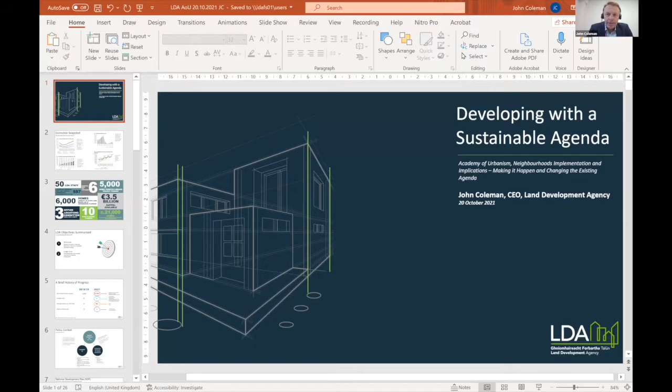So in my presentation, which I'll share now, I'll just give you a little quick whistle-stop tour of the LDA, where we've got to date, just our broad view on the sustainability agenda, what that means for us on a practical level for project base, and also from a governance base as well, and how do we measure, how do we monitor, how do we invoke this. So I'm just going to share my screen. And I hope that can be seen.

So the LDA, we started from nothing about 3 years ago. We're currently on sites that could yield around 6,000 homes, but there's been a commitment from government to transfer an additional 15,000 homes worth of land, if you like. And I think they're the really big opportunities, those longer term, larger scale ones where we can really drive master planning, efficiency of design, and some of the sustainability metrics that we're going to invoke, which I'll talk about in a moment. And so what's the LDA doing? It's doing two things really.

It's delivering mainly affordable homes on state lands in the short term, as quickly as we can through a number of ways. And also in the longer term, this active land manager role, this land assembly role - drawing a red line around very large scale strategic areas for putting together not just a design and master planning solution, but also an implementation plan. We'll talk about that again in a moment.

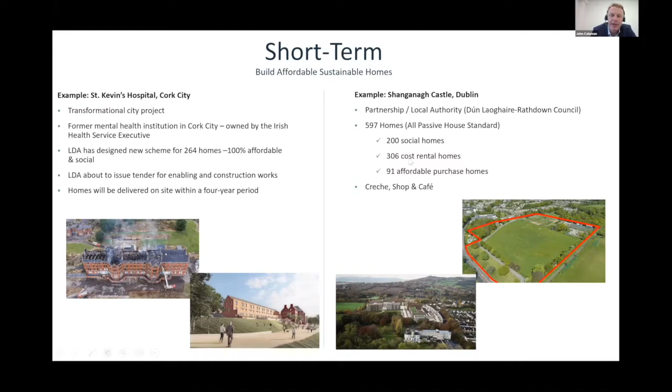Shanganagh Castle, similarly, is around 600 homes in partnership with the local authority, Dun Laoghaire-Rathdown County Council. The sustainability piece is the mix of social and affordable housing, promoting sustainable communities, but also the design standards themselves, very airtight and designed to passive house standard, utilizing a centralized heating system.

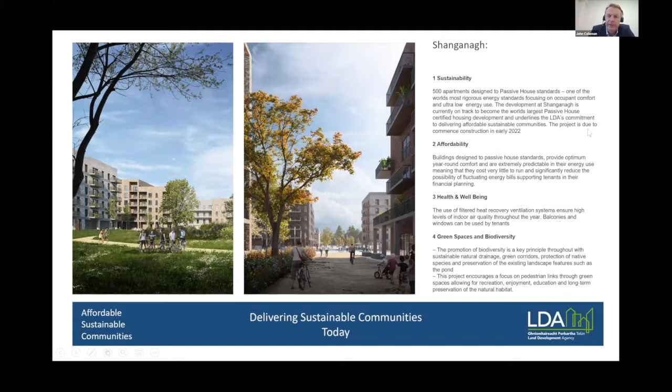So this is about delivering sustainable communities today. I guess the tagline there is passive house, and the certification of that I think is going to be very interesting, and we hope to commence construction early next year on that. There's also a number of green corridors and a lot of amenity green space included, which is going to make it quite a nice livable area to live.

So that's today, but in the longer term, I think that's really the big opportunity for the LDA and sustainability. I mentioned that we've drawn a red line around a number of areas within Irish cities that of their own could be transformational in the city context. So we've taken inspiration from a number of places further afield, which I'll talk about now.

Our approach to these has generally been to work with the Royal Institute of Architects in Ireland to bring in architects and perform a bit of a blue sky exercise called a design review. That comes out with high level ideas, and then to further ratify those and draw them out in the form of a master plan, which we've called a spatial framework, which positions us for consultation, and then we can look to pick off opportunity sites for development and planning applications.

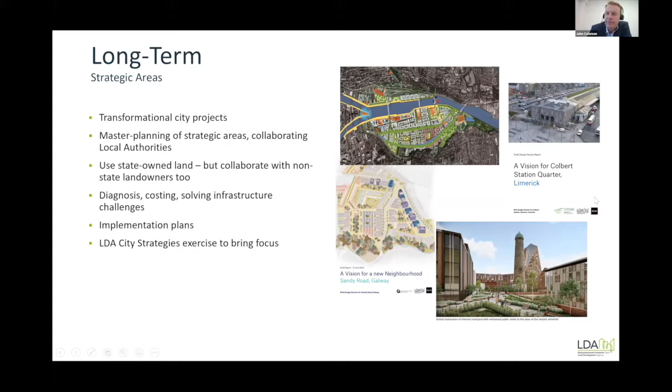We got some of the ideas for this concept at similar scale. Many people here will know about these: Hafen City in Hamburg and Nordhaven in Copenhagen share elements of what we're talking about. All state lands relied on transport infrastructure, were long-term projects, but were designated areas, master planned, with proper governance structures put around them to deliver them. That's the exact same type of concept we're trying to invoke with our strategic areas as well.

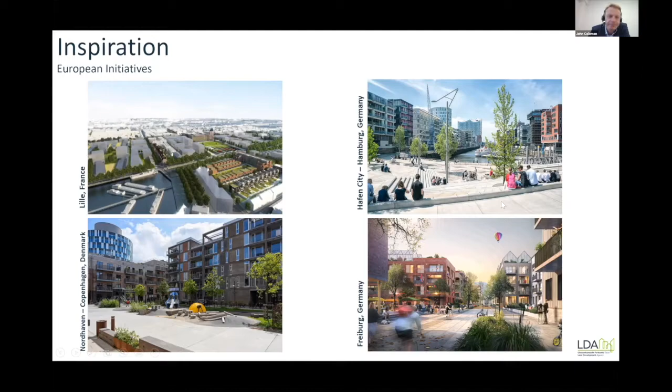Slightly closer to home, the UK - one I'll mention is by our friends at RKD Architects: King's Cross in London, obviously leveraging train yards and formerly half-derelict areas to bring forward a new rejuvenated area with live-work propositions. RKD Architects, an Irish architectural firm, recently won a competition for ideas for affordable housing in Sunnyside in Queens, New York, which is the largest disused train yard in America, I think. But these are all quite relevant, quite inspirational for us.

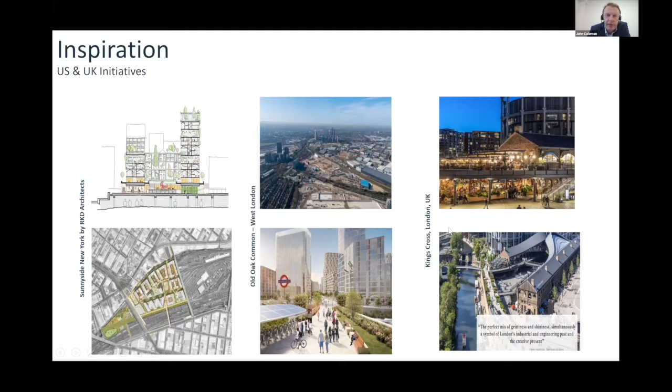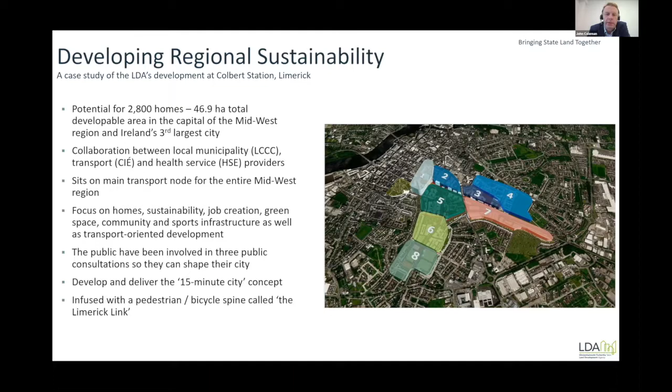So it's trying to create a new live-work proposition to attract investment, employers and occupiers, but to do it in a sustainable way, focusing on a modal shift away from cars. We've designed in a spine connecting all the districts, called the Limerick Link, which is an elevated pedestrian and bicycle lane that goes right through the site, and we think can eventually be iconic in bringing all the various parts of it together, really focused on driving away from car usage into more sustainable modes.

There's a significant focus on green spaces too. Maintaining the existing biodiversity and improving it is a key objective, but obviously we try to balance that with sustainable, dense development as well, which we want people to do.

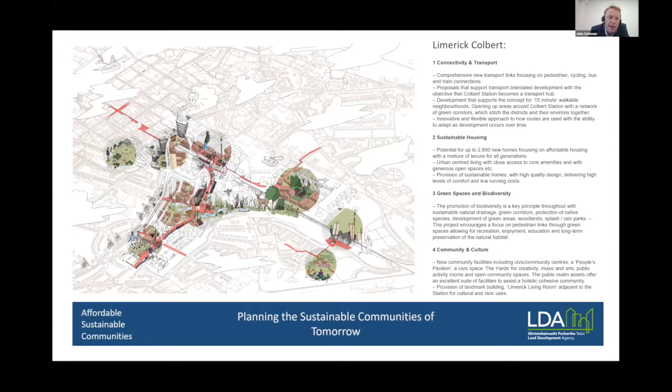One of the other project-level concepts we've been discussing and advancing: we have this constant battle in Ireland about height, and height is generally unpopular. We're trying to work with the concept that you can still have good densities without height.

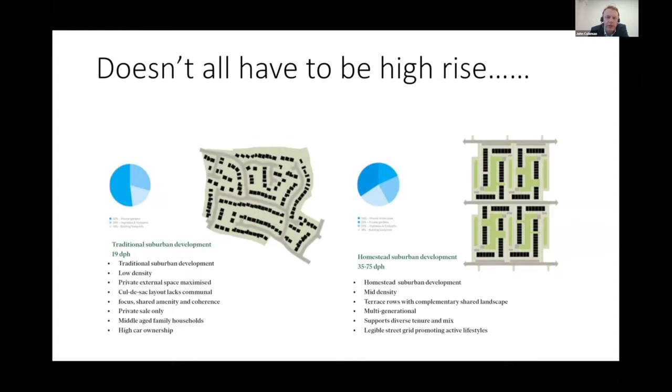One of our schemes, particularly Balbriggan, called North Dublin, is about 800 homes we're advancing through the planning system. We're promoting the idea of the homestead, a suburban development with shared spaces, more dense, more uniform typologies, rather than the traditional suburban spread-out big gardens. We think we can achieve quite good densities without necessarily going high, almost comparable to apartment densities at the upper end. This is an extract from that homestead model.

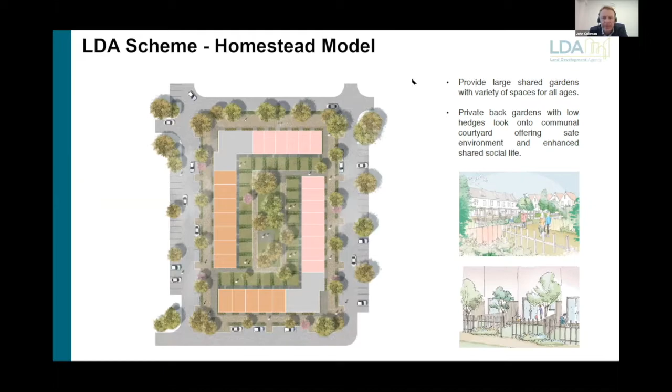The developer model in Ireland would typically try to concentrate densities over a wider site, with very high density in one corner while the more commercially viable, cheaper-to-build house typologies are spread more sparsely throughout. We're trying to achieve a more uniform densification through the site with mid-density typologies, set out as what we refer to as homestead.

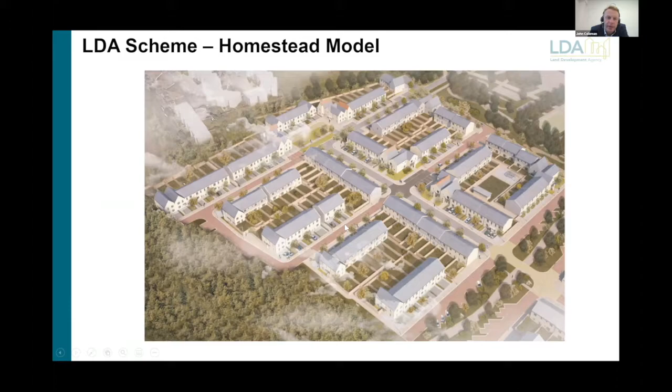As you can see, I think it's quite an attractive and inoffensive development form. A lot of shared space, and it's obviously compact and dense enough, but not too dense. That's just another artist rendering of it.

From a governance perspective, and how we implement all of this and measure ourselves against it: we have national strategic outcomes from the National Planning Framework, which is the wider planning governing framework. They flow into our own policies as a government body, and we are identifying metrics and governance to ensure that we measure ourselves against them.

We're a new agency, still developing these, but how we're going about it is that the National Planning Framework flows down through the LDA and the LDA Bill, now the LDA Act, which gives a statutory requirement to have a sustainability policy, implemented through the Board of Directors. We have a strategic planning and sustainability subcommittee which deals with all of these matters, and a separate strategic planning unit which comes up with policies and implementation aspects through design standards. That's broadly our governance framework to oversee this.

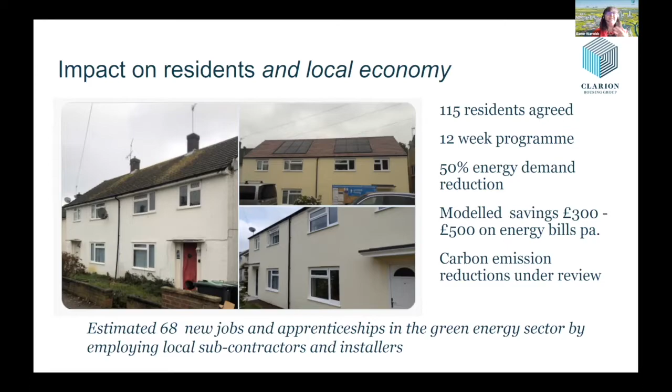We've got a really nice programme which is coming out from the learning from these pilots - partly monitoring long-term outcomes for residents. And again, there's some really practical things, like we are doing so many air tightness tests - it's going to be phenomenal, so much data coming through from that.

One of the things we're starting to think about, and we've got the bid already in for the next wave, is the first specification was quite Rolls-Royce. The level of investment, even with government funding, is quite high, and it's not necessarily sustainable or one we could roll out across all of those properties we have. So there's a lot of thinking going on about the specification - hopefully there will be economies of scale, but how can we do that? Because I think the history of retrofit programmes in the past is partly where pilots actually falter, and it depends not just on the subsidies and the subsidies stopping, but the established supply chains being able to deliver.

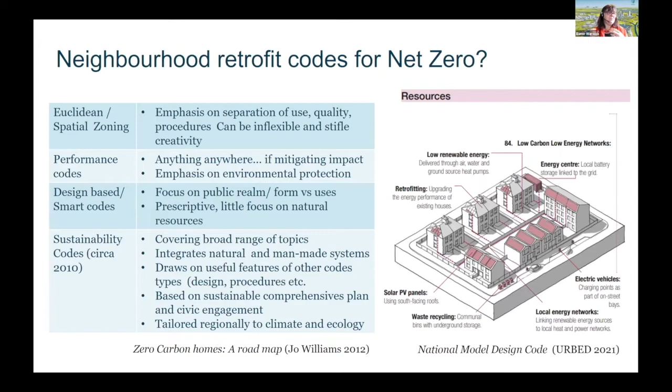My final slide. The message from what I've said is retrofit's hard. Reaching net zero, not just the standard of EPC, is hard. Scaling up from individual projects while keeping residents at the heart of that is even harder still. But if, like Clarion, you're serious about placemaking for communities over the long term, we have to be thinking and doing more.

I want to leave you with this idea: we need to be thinking beyond net zero to a net positive agenda. Rather than limiting our actions to doing less bad, to reduction, how can we have a positive impact, be regenerative, generate value, create, enhance and restore. As soon as you talk about generating value, that sits well with regeneration and even our developer colleagues. It's about bringing this all into a holistic approach.

Net positive is about creating a surplus, adding back more than was there in the beginning. It's not just 10% more biodiversity, but going from a rundown estate where everyone wanted to leave, to a place where people are keen to live, to bring their kids up, and to invite neighbours into their homes, which are warm and decent and places they can be really proud of. And I'll finish there.

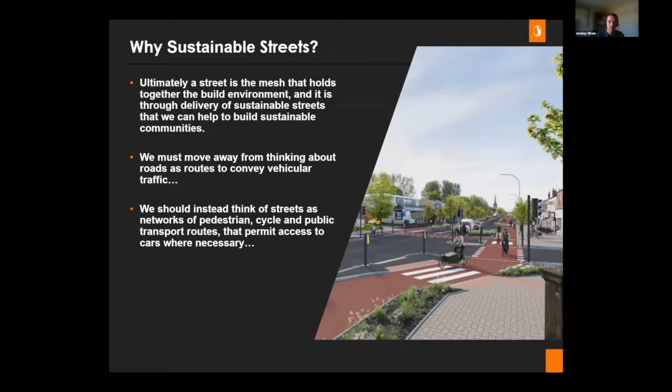So where are we at the moment, and what are the negative consequences of a bad street? A lot of estate road design came off the back of Design Bulletin 32, which gave a lot of the structure to the way we develop streets in new developments. It laid homage to the 6-meter radiuses, the verges, the footways to the side, and that kind of car dominance. That's resulted in the past 50 years in cul-de-sac developments, out-of-town shopping, complete reliance on car ownership, and poor use of space and lack of character.

And we still see that kind of blockage coming through. Design Bulletin 32 is still referenced by certain highway authorities, and it's taken a long time for some of the new thinking to break through.

Thinking first at a very high level from a policy perspective, and what sets the scene for what we end up delivering, currently our model is based on this idea of predict and provide. We use all manner of clever models to try and understand, based on how many people we think are going to move into an area because of the developments happening, what impact that's going to have on the local road network, and therefore how much bigger we need to make the roads, how many new roundabouts we need, where we need traffic lights—all these things that end up making larger and larger bits of road network.

And we move from that to this idea of vision and validate—saying the local area, through policy documents, has a vision for what they want the neighborhood to look like, and we as designers have a role in making that vision happen. Rather than saying we know that 100 new houses is going to generate X number of car trips, we want to say there's 100 new houses, and therefore we're going to put in really high quality cycle infrastructure and a new bus route, and actually encourage people away from their cars and onto more healthy and sustainable modes of transport, creating the future that these visions have set out.

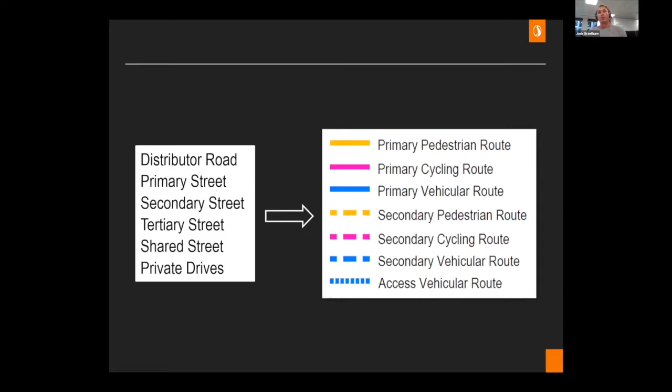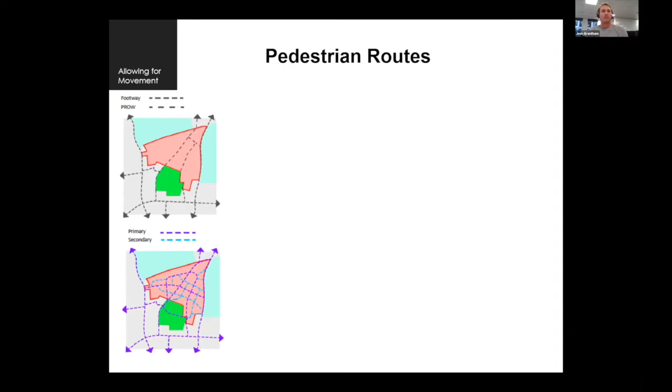Starting with pedestrians, we think about the existing infrastructure, how we're thinking outside of the red line boundary, public rights of way for instance, and we're asking designers to create primary and secondary routes—really simple, but creating a nice tight web of routes.

Then we go on to cycling routes. We've got lots of new documents to reference here, but we still need to think about how that fits within the existing context of Suffolk, understanding the existing infrastructure, and then creating again that web of primary and secondary routes. You'll see why the primary and secondary hierarchy becomes quite important.

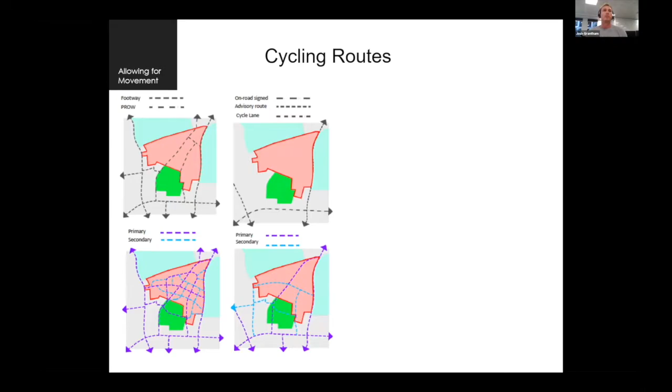Public transport is a slightly different beast because we need to think about the public transport routes—they set the tone for how we should think about primary vehicular corridors, so where are our bus stop locations going. Then, second to that, we go back through stages one and two, referencing and checking that our cycling and walking networks are set up to align with the transport network.

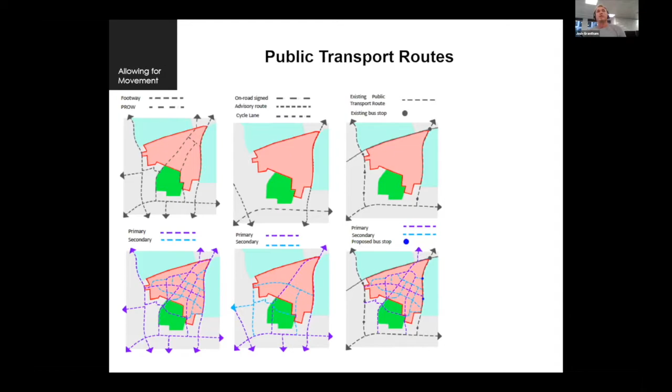Finally, we think about vehicular routes, for the private car and access and a few other things. Now we've got three hierarchies: we're only showing primary and secondary here, but there's primary, secondary, and access. The access gives us a way to prioritize other users over vehicular traffic. You can see the density of those routes is significantly lower than the pedestrian route.

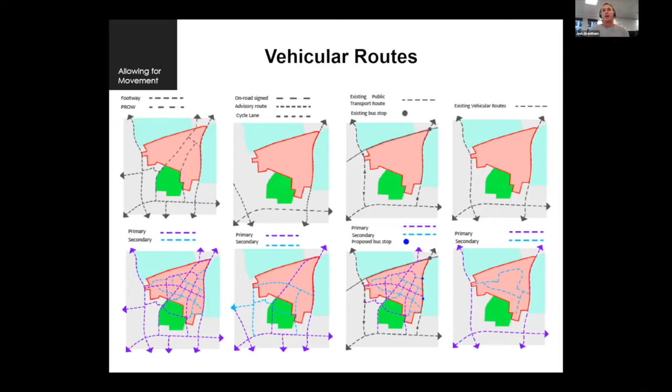Then we mash all this together and create movement corridors. Through creating movement corridors, we can understand intersections—this is intersections with new streets and existing streets. For instance, movement corridor 2, if you remember the old slide, is an existing corridor that we're putting new users on.

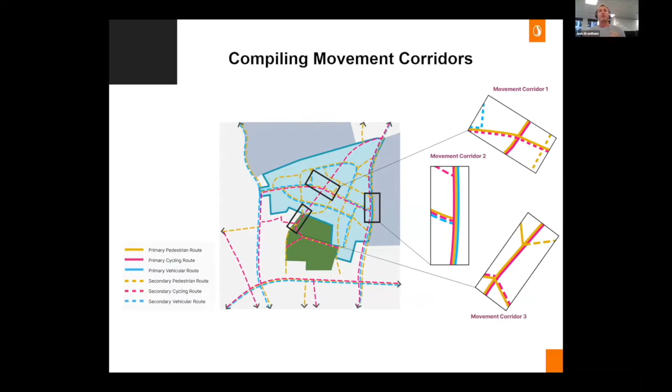We basically go through that process of designing for each user in that road corridor. Movement corridor 1, with a couple of steps in the middle shown top left, can translate into a movement corridor like this, where we understand the users within each setting. For instance, here we know we've got a primary pedestrian-cycle route east to west crossing a secondary vehicular route north to south, so we have to make sure the design cues are right to ensure that priority is actually carried through—from the concept of users first all the way through to the design.

And I'll hand back over to Wes.

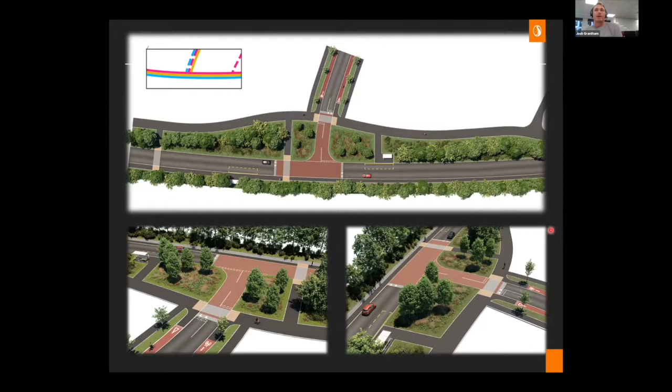Thank you, Josh. So we're going to take that same process and principle a step further and look at an example from a real city. This is in Cambridge, close to where our office is. We've got Newmarket Road, one of the main arterial roads that links into Cambridge, taking you out towards Newmarket and then to Ely. It's a pretty typical Cambridge urban environment, I suppose looking fairly suburban to people more familiar with bigger cities.

We've got our overlay on here with this same principle. Running through the middle we have our primary vehicular route, but it's also a primary pedestrian and cycle route through this middle section linking into the city. Then we've got a secondary vehicle route looping around, connecting to everything else going on—various non-residential aspects, an industrial estate, some shops and other things, linking into the actual access routes into the residential properties themselves.

But what we do is call these access for vehicles - these still form our secondary routes for pedestrians and cycles, because when you get into these environments close to the home, the priority should always be to those who aren't in cars. That's how this hierarchy approach helps us start looking at that.

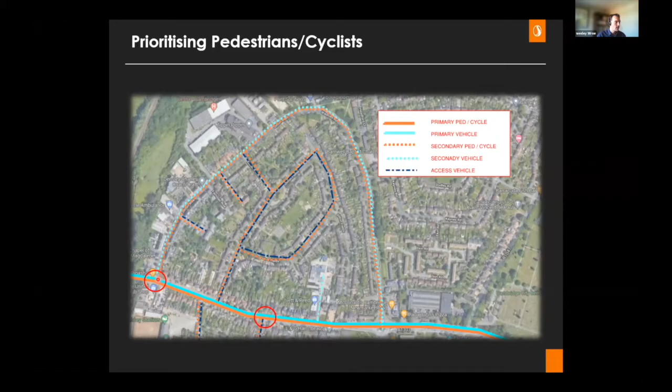So I've got two examples of junctions that we're going to look at in more detail to see how we can start to change existing street design to work better with this hierarchy. The first one is our primary pedestrian, cycle and vehicle route linking into an access to a small block of flats. The second one is our primary vehicle, pedestrian and cycle route linking to our secondary vehicle, pedestrian and cycle route.

This first one is pretty typical for an access into a small residential estate. We've got nice large radiuses on the bell mouth, drop curbs taking pedestrians down to street level to cross, and advisory cycle facilities, although they're pretty poor quality, just delineated with old white lines that haven't had much love in a while. And in the verges, we've got informal parking blocking everyone's visibility of each other.

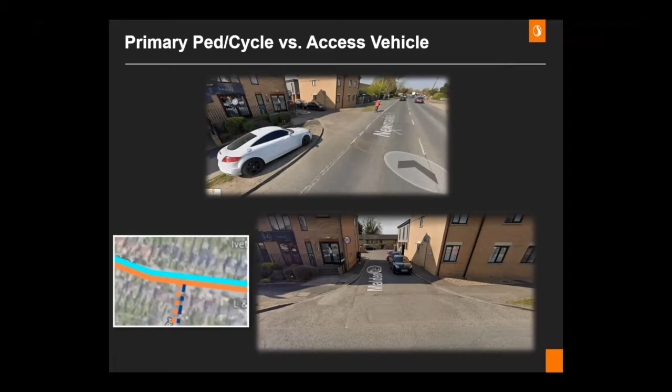We can then look at a transformation of this route, taking a lesson from our European friends and adopting continuous footpaths - removing the radiuses and keeping pedestrians level through the crossing. In this example we're not showing the cycle facility, but you've got the cycle facility along the front. You can completely change the way the street is used and give priority to pedestrians, for whom this is a primary route, over vehicles who are just gaining access.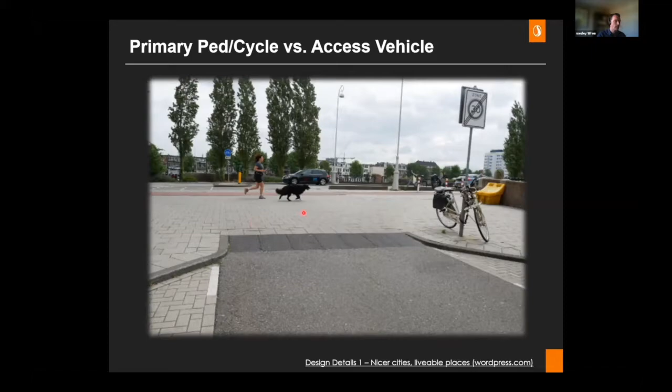So we'll look at one final example, the second point where we're linking onto a secondary access route. Again, in the existing scenario, our cycle facility is completely lost over the junction. We've got a fairly substandard refuge island for pedestrians and some pretty faded 20-mile-an-hour signs.

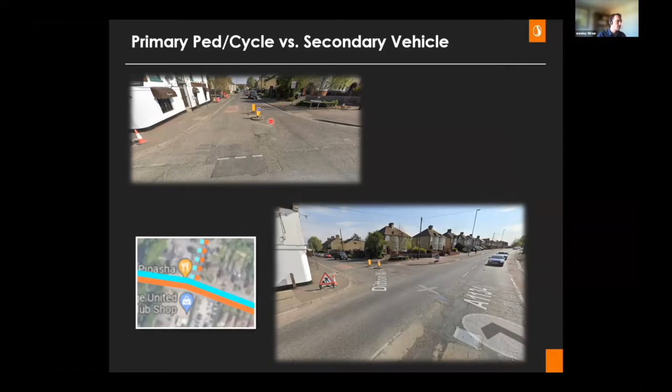What we can do here, taking a design example from LTN 1/20, our latest cycle design guide - on our main road, when cars take the turning, we set back our crossing for pedestrians and cycles, giving them priority to continue across, and allow space for cars to give way while fully facing the pedestrians and cyclists. So you've got good visibility in both directions, and the car is instructed to stop and give way to those crossing.

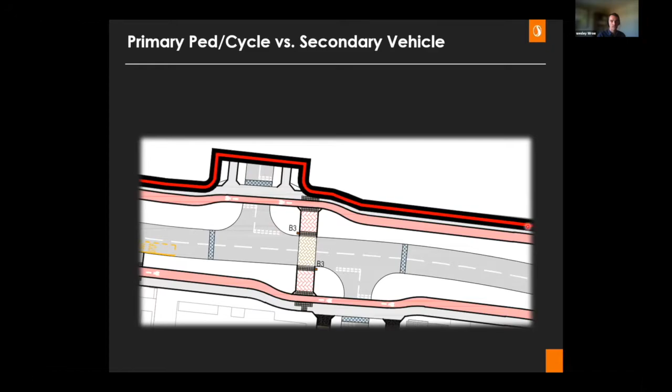Through design like this, we can make sure we're really enshrining the priority of the way these users are behaving, making sure pedestrians, cyclists and more vulnerable users get priority at these crossings - and it really doesn't take much more street space than what we currently have. There's lots of great examples coming up in urban environments of how this sort of design is getting worked in.

So as a closing slide, we've got a few top tips to leave you with. Firstly, stop thinking about primary, secondary and tertiary streets and start thinking about the different users, how they fall within the hierarchy, and who we're designing for. Design in priority from the site at all scales, for each of those different elements we've looked at - and obviously there are many more - and ultimately be flexible with the elements we're using to tackle these challenges.

There's loads of great examples of how you convey pedestrians and cyclists and how you deal with junctions that are much more creative than a lot of the junctions we typically see in our urban environments.

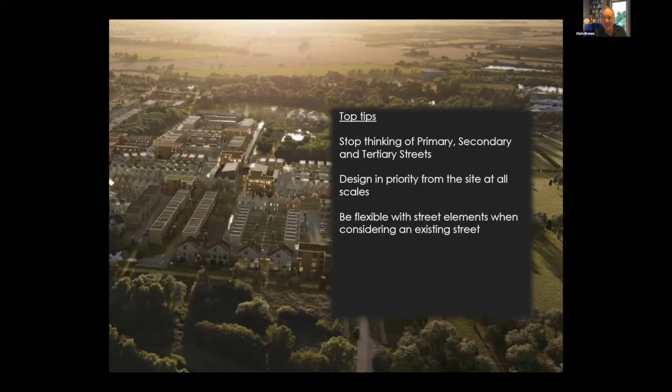Thank you very much, that was fantastic and really uplifting. Can we unshare the slide, Wesley? Fantastic.

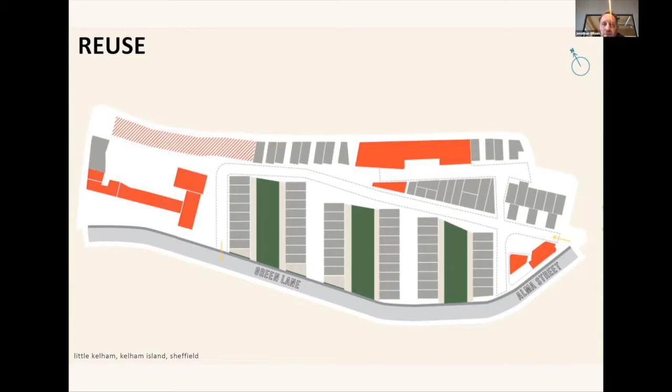That often can be the status quo, particularly as from a development point of view, we get obsessed in the early stages by appraisals and what things are saying on day one, rather than taking a long-term view of the amazing places with the ingredients and the history, that just doesn't get articulated in early business modeling. We included and wanted to retain all the existing buildings on site to form part of that place, that story, but also to create beautiful buildings that complemented the new architecture and spaces we were going to create on day one.

I've thoroughly enjoyed preparing for this presentation and going back and pulling things out. Some of the principles we had from day one was that we never compromise on the vision. That's something we have on all our developments. When you are trying to challenge the status quo, trying to break the rules, you have to remake the rules, and with that comes frustration. That's something we deal with through an amazing team and culture within our business, and something we'll never negotiate on.

From a design perspective, removing cars from the landscape, hiding them, and asking if we really need them at all is our first point of call. We're not in competition with house builders, but we're building a medium density place more akin to Europe. So hiding the cars and tightening up those streets has been a hugely important principle we've stuck to. And with the existing buildings, it's making sure we don't accept that they can't be improved from a performance perspective, and we challenge on that.

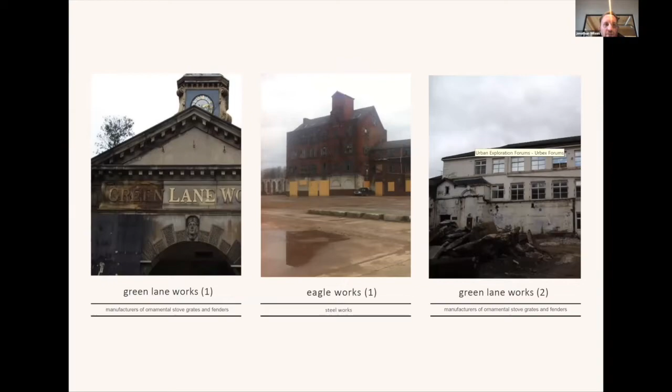The ingredients we were served with on day one at Little Kelham was an amazing Green Lane Works, Eagle Works, and Horseman Square, which offered these amazing buildings that genuinely were going to be pulled down only weeks before we stepped in and intervened during the purchase process.

It's very easy on a spreadsheet to remove these buildings, particularly when looking at performance factors of how you improve the fabric of the building. The way we set out to improve these buildings is, number one, protect and respect them. Protection is obvious—these are beautiful buildings, amazing architecture—and respect in the sense that we may not be able to do everything we want to do, but if we're going to protect them, what can we do?

All of these buildings that are now in use are heated through biomass. We took a fabric first approach—we insulated from the inside of all the buildings, and we allowed the character where it was available to still shine through.

It's very easy during this process to get bogged down in the detail, particularly with Green Lane Works, which was a grade 2 listed building. Don't forget the design, and the second message we'd always have is make sure we remember the people and how they are going to use the buildings in the end.

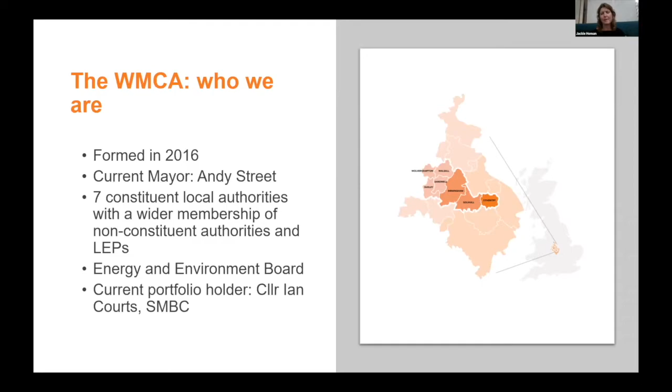Our current mayor is Andy Street, and we have an Energy and Environment Board. The portfolio holder that leads that board is Ian Courts, and that's the political board - he's actually the leader of Solihull Metropolitan Borough Council. That's the political board that oversees the work and drives the ambition in this space.

So we declared a climate emergency in June 2019, along with a whole range of local authorities, and have a net zero target for 2041. We have a number of plans in place that cut across 4 broad areas, so climate change - we've got a 5-year plan, which I'll talk a little bit more about in the next few minutes, because that's driving a lot of the work we need to do around retrofit in particular.

Energy - so we have a partnership called Energy Capital, who are leading on the retrofit and energy work, and also a program called the Net Zero Neighbourhood, which I'll touch on at the end, because I think that feeds quite nicely into some of the really inspiring examples we've heard this afternoon.

We have a natural environment plan, so looking at natural capital, green space, widening access to green space, and thinking about how we can build that into our places across the West Midlands. And also a circular economy plan, where we're looking at things like zero waste construction, food sharing, and circular manufacturing. We're not treating those things in silos - as you'll all know, there's some real overlaps between those areas, so we work collaboratively across all 4 of those.

Our 5-year plan was approved by the Combined Authority in March this year, and focuses on 5 key areas. I'll delve into those a little bit more, but around domestic and commercial heat and retrofit, around industrial decarbonisation - for those of you who know the West Midlands, you'll know there's a big industrial heritage and also continuing industrial activity in the region - transport and mobility, and also strategic land use, where we've largely looked at large-scale renewables and tree planting and natural capital.

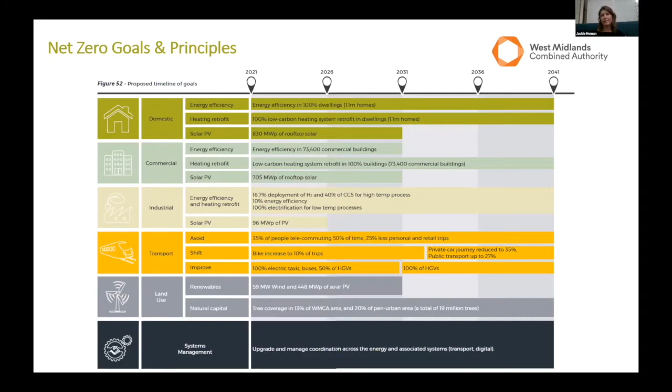I think what's really important is the need to treat all of this as a system, so you can't necessarily take one element at a time, and that's something that we're looking to develop through our net zero neighbourhood work, which I'll come on to at the end. In terms of the challenge out to 2026, it's significant.

So WSP considered the net zero target for 2041 and then looked at what that actually means for 2026. You can see the quantities of properties we're looking at needing to retrofit, both in the domestic and commercial sector, and the number of trees that we need to plant.

These are all really big challenges, but what's been really good about developing the 5-year plan is we now have the quantity, and we can address the next steps and work with our politicians on the scale of ambition and what needs to be put in place, as well as things like citizen engagement and looking for innovative financing models to realise the different elements of the plan.

As a combined authority, we are quite limited in terms of some of the things we're able to do. For example, planning is a responsibility that sits with local authorities. So as we developed our 5-year plan, we were really mindful of the principle of subsidiarity - what works best at what level, and what works best if you do it at scale.